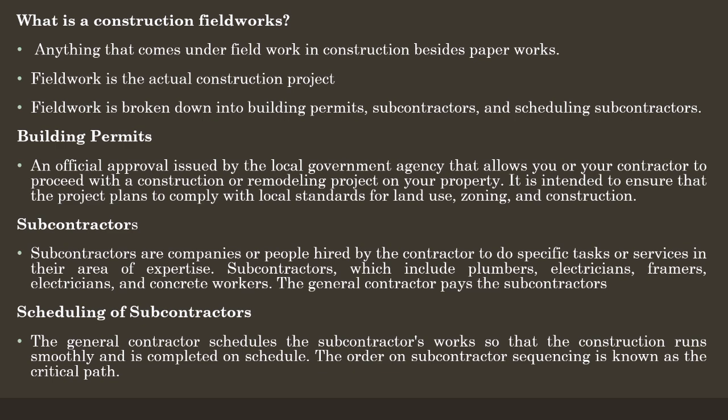Now let's discuss the types of construction fieldwork. The nature of construction fieldwork is nakadepende siya sa kung anong type ng project. So let's look at two main categories. We have the light construction and the heavy construction.

Sa light construction, nag-refer siya sa mga projects with standard building techniques like wood stud walls, rafters, and joists. From the word light, this is common for residential buildings such as houses, duplexes, or small apartment complexes. These projects generally use lighter materials lang and involve less complexity compared sa mga heavy construction.

The second is the heavy construction. Heavy construction, from the word heavy, involves large-scale projects requiring the placement or removal of substantial materials. Examples dito is yung mga highways, airports, dams, and treatment plants. These projects demand advanced engineering, heavy machinery, and specialized expertise.

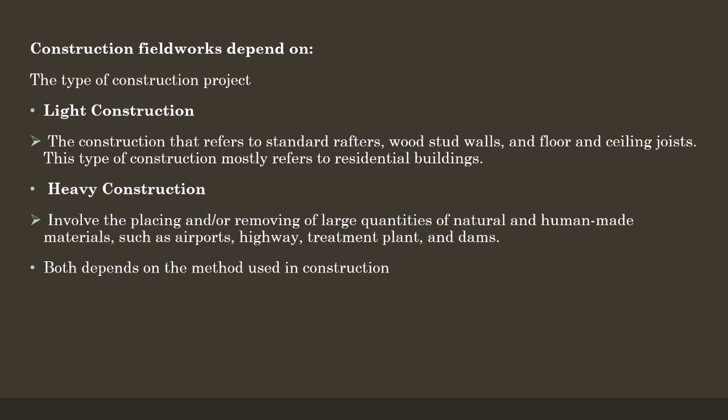Both light and heavy construction projects depend on the chosen construction method. These methods affect how materials are handled and tasks are sequenced on site. The list of construction fieldworks will be reported by our next reporter.

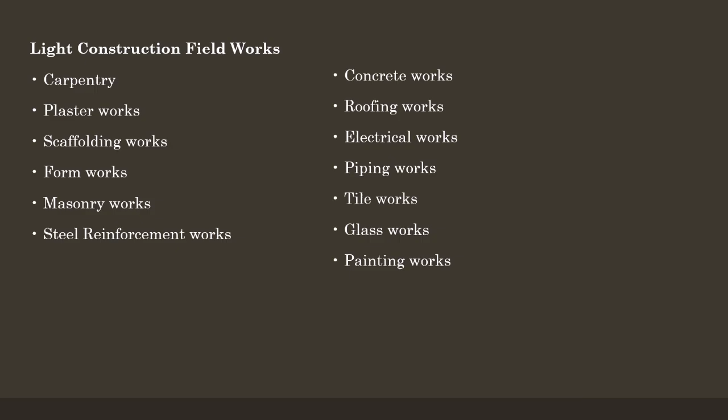Good day, I'm General Ritardo. I'm the next reporter. My topic is light construction fieldworks. There are 13 parts: carpentry, plaster works, scaffolding works, formworks, masonry works, steel reinforcement works, concrete works, roofing works, electrical works, piping works, tile works, glass works, and also painting works.

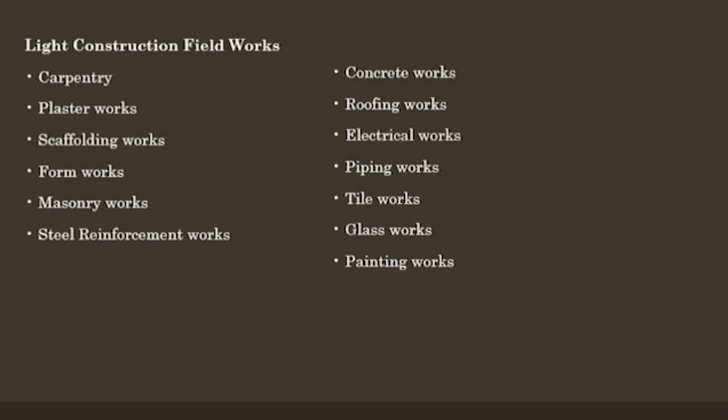First is carpentry. Carpentry is construction work by processing or applying wooden materials or wooden structures. Carpentry is pagbuo ng mga struktura gamit ang mga kahoy. Kabilang dito ang paggawa ng mga pinto, bintana, cabinet, o sahig.

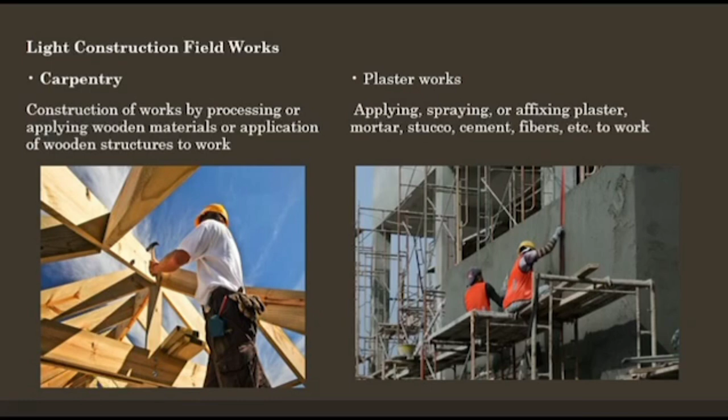So, next is scaffolding. So, scaffolding: assembly of scaffolding, transport and placement of heavy objects such as mechanical apparatuses and construction materials, assembly of steel frames, and demolition.

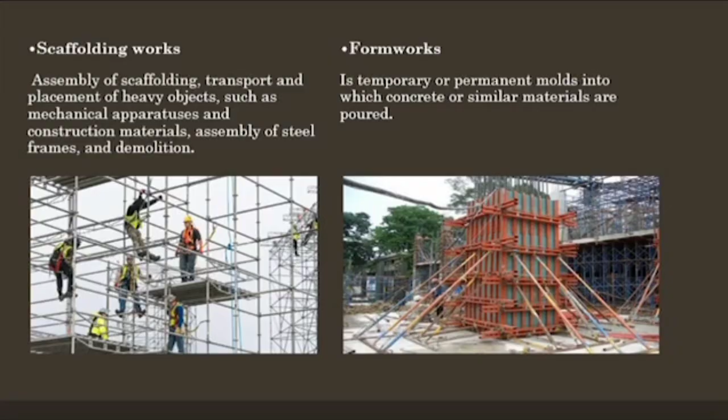So, next reporter. So the next lightweight construction fieldwork is the masonry works. Now, this refers to construction of structures using individual units, which are often laid and bound together by mortar. The materials typically used are bricks, stones, or concrete hollow blocks. The process of masonry works requires precise measurement and arrangement of these units to ensure the correct alignment and strength of our structure. Skilled masons are essential in building walls, foundations, and other parts of the building to ensure quality workmanship.

The next is the steel reinforcement works. Now this involves the installation, processing, and connection of steel bars or reinforcement within concrete structures to enhance their strength and durability. In this type of work, steel bars are placed in formworks before concrete is poured. Steel reinforcement is crucial in helping concrete handle forces such as tension and bending that might affect the structure's stability.

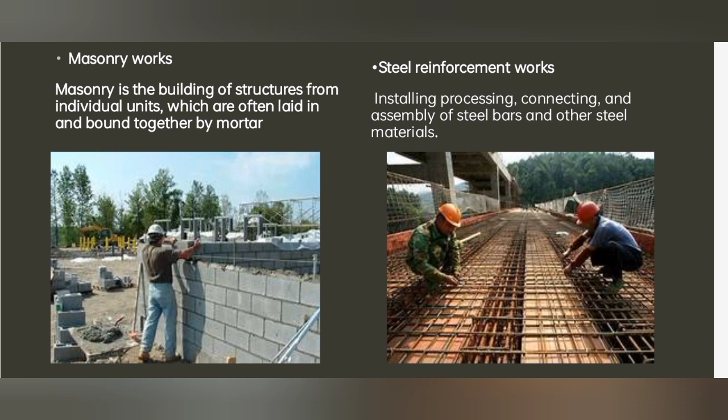Now, another lightweight construction fieldwork is the tile works. This involves the construction with bricks or concrete blocks or application of tiles onto walls, floors, or ceilings of a structure. This is commonly used in areas like bathrooms, kitchens, and restrooms where a strong, easy-to-clean surface is required. Tile work requires skill in cutting, measuring, and aligning tiles to achieve a clean and professional finish.

Another is the piping works, which refers to tasks involving installation of systems for transporting water, air, and other fluids or gases within a building. This includes the installation of metal pipes or water systems, air conditioning, and hygiene facilities. It also covers the piping system for transporting water, oil, gas, and steam. Now, this type of work requires knowledge of various piping materials and proper installation techniques to ensure safety and functionality.

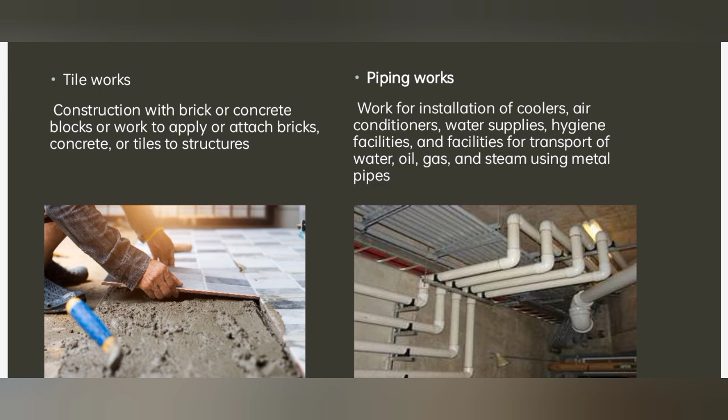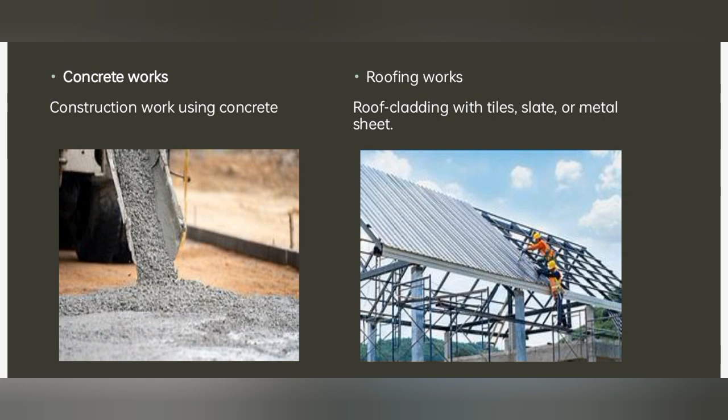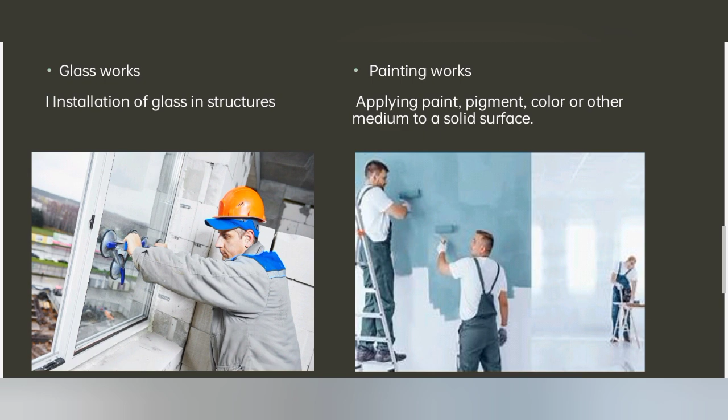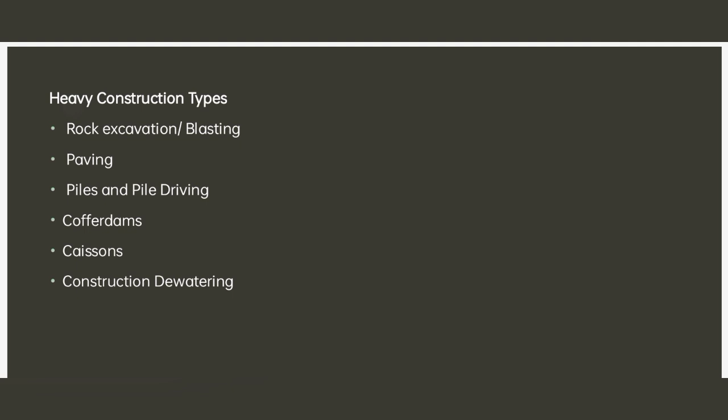For our rock excavation, this is the process of removing large amounts of rocks or other hard materials from a site to make way for construction. This is usually done in areas where the ground is too hard for traditional excavation methods, such as in mountain ranges or rocky terrain. Blasting involves using explosives to break the rock into manageable pieces for removal. After blasting, the site is cleared of debris and prepared for further construction. This type of work requires strict safety measures due to the use of explosives and other potential hazards associated with it.

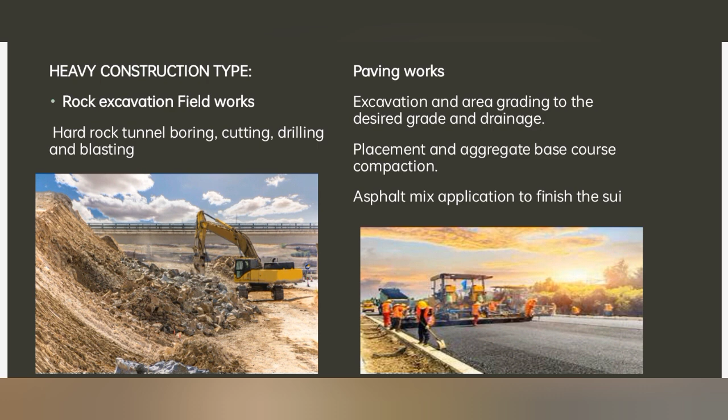The next is paving works. Paving works is a process of laying down a durable surface, typically on roads, parking lots, or pathways, using materials such as asphalt, concrete, or stone. The primary goal of paving is to create a smooth, stable, and long-lasting surface for vehicles or pedestrians to travel. This includes preparing the ground, adding a base layer of materials, and then placing the final layer of paving materials. Paving is crucial in roadwork and infrastructure development, ensuring that the surface can withstand heavy loads and weather conditions.

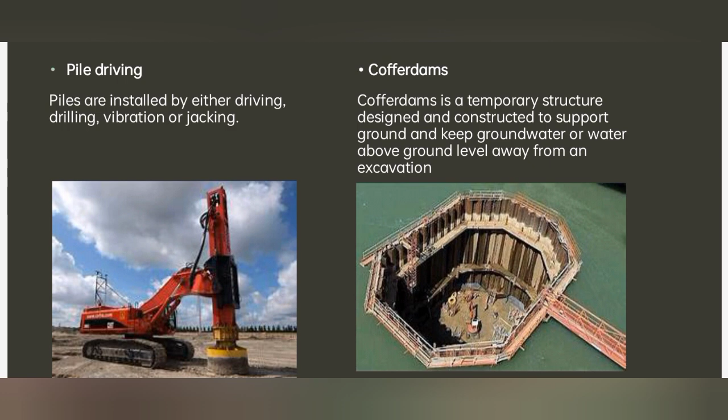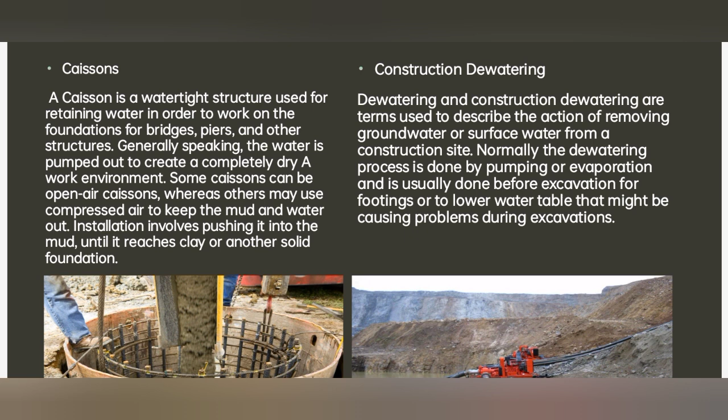Next is construction dewatering. It refers to the process of removing groundwater or surface water from a construction site to create a dry environment for work to proceed. This is typically necessary when excavating in areas with high water tables or during underwater construction. Dewatering methods include the use of pumps, well points, or other water diversion systems to draw out excess water. By keeping the site dry, construction work can proceed safely and effectively, preventing flood, erosion, or damage to equipment and structures. These heavy construction fieldworks are crucial in large-scale infrastructure projects, often involving complex machinery, techniques, and safety measures to ensure successful project completion.